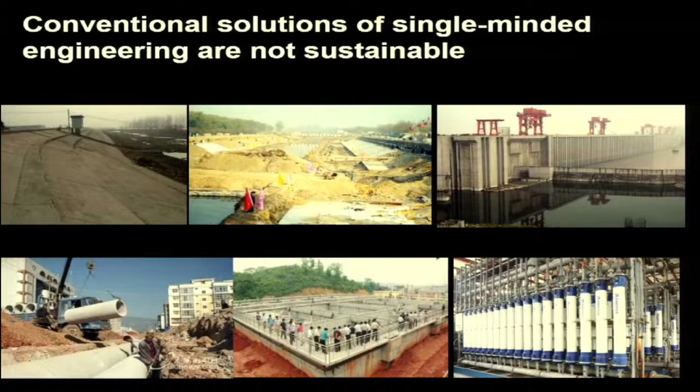We share the same problem today: global climate change, flood, drought, pollution, habitat loss, and many more. Conventionally, we have very strong engineering solutions based on industrial technologies. We build dikes, ponds, pipes, sewage plants, trying to solve this problem one by one, single-minded, one shot, one problem. But eventually we find those solutions didn't work. Cities get flooded all the time. We didn't solve the problem. 85% of sewage water still runs into the rivers, globally. In China, 75% of surface water is polluted, and in other developing countries in the south, maybe more.

So I'm talking about an alternative solution, which is sustainable, not so expensive, easy working, nature-based, holistic. The ecosystem service-based solutions, the nature-based solutions - we call it green infrastructure. Landscape architecture can play a key role in putting forward this idea to create this alternative green infrastructure, which I call ecological infrastructure - through planning and design. For the planning, we can solve the problem globally. We think of the globe as a garden, as a landscape.

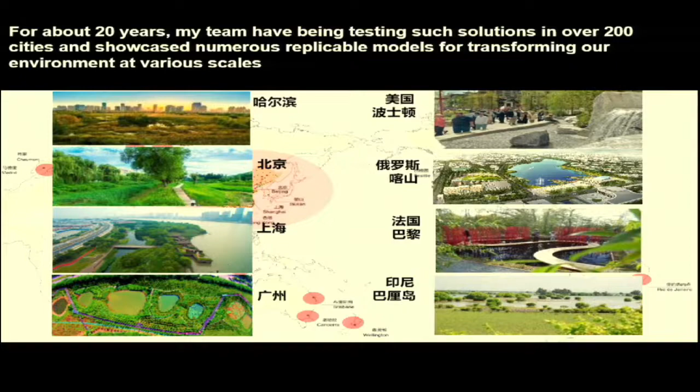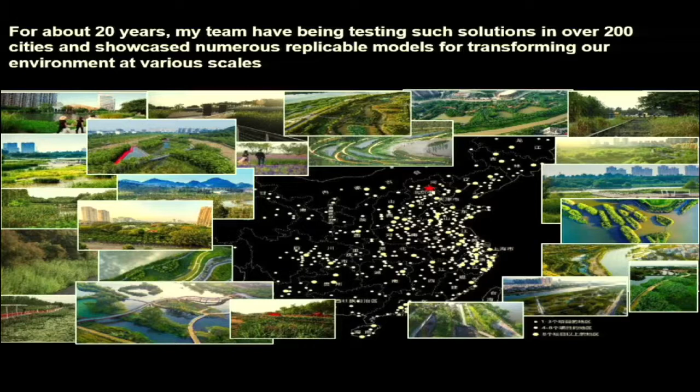In the past 20 years, we practice this kind of nature-based solution globally, but particularly in China. We have built over 500 projects so far in over 200 cities in China. We also have projects in about 10 countries - Russia, US, France, Paris, Indonesia. In China, these projects demonstrate how we can use landscape as infrastructure to solve problems holistically and across scales - national, regional, urban, all the way to your backyard and even your bedroom. That's the idea: how can we use nature as a solution.

For example, in China, engineers usually try to protect the city from being flooded. But when we look at the rivers, the water only takes 1% of the whole national land. Yet every year we invest billions of dollars trying to protect the city from flooding. Why bother? The water only needs 1% of the land, maximally maybe 6%. That's the case in China, and I'd say it's quite similar in other parts of the world.

Because we built the city in the wrong place. 70% of the cities, in terms of land area, are built in the wrong place. For example, in China, 70% of GDP, or 70% of population, is distributed in the flood zone - high-risk flood area - which means at the beginning we built the city wrong. We selected the wrong place. So we have to think: how can we select a better site for the city, for future development?

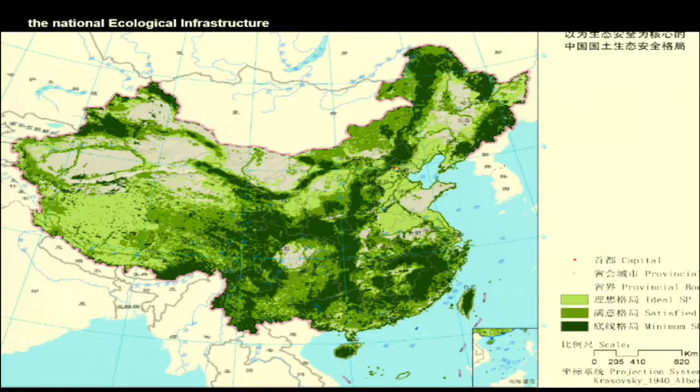We still need to move a lot of people from rural areas to the city. So what should the next city be? Where should we build it? Like Indonesia - just a couple of weeks ago, the Minister of Indonesia for Development and Planning visited my office and said they're going to move the capital. So where to build the capital, without being flooded, avoiding flood? That's the job landscape architecture should do.

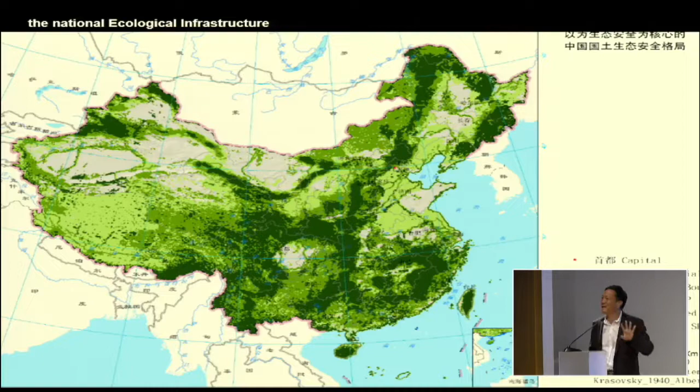So we think globally. If we keep the green area protected, we virtually create an ecological security for the nation. That's how the city should be built. That's a vision at the national level of thinking.

Regionally, how can we avoid flooding? Keep the water, protect the habitat, and integrate with bicycle lanes and pedestrian networks. All together, create a green sponge that can hold water. So the monsoon flood will be kept on the ground, seep in, retain, and go back to the aquifer. That's the whole idea about the sponge city - without diverting water to the ocean, but trying to keep and retain it, because the whole world is in shortage of water, and we have dry seasons.

During the dry season, you need water. So use landscape as a remediator of water. So the city will build differently. Instead of based on gray infrastructure—build pipes, build highways—we say why don't we use a natural system as infrastructure, for example as a drainage system. So we will have a much more sustainable, more resilient city.

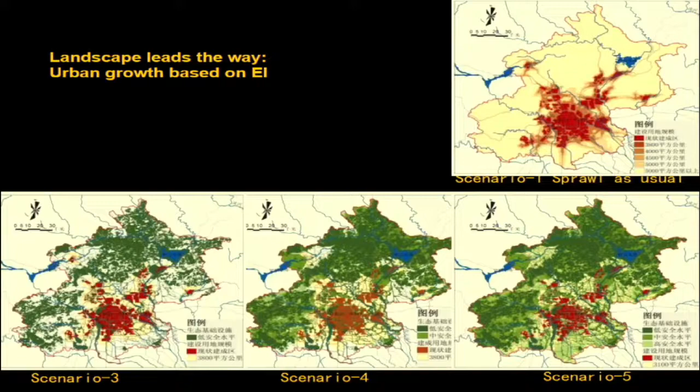But the ponds were created by farmers for thousands of years. The farmers know how to regulate water—create a pond to irrigate the field, to remediate the monsoon climate. During the rainy season, they keep the water. During the dry season, they use the water to irrigate the rice paddy. That's the whole idea, from our tradition. But the Industrial Revolution wiped out all this wisdom based on experience.

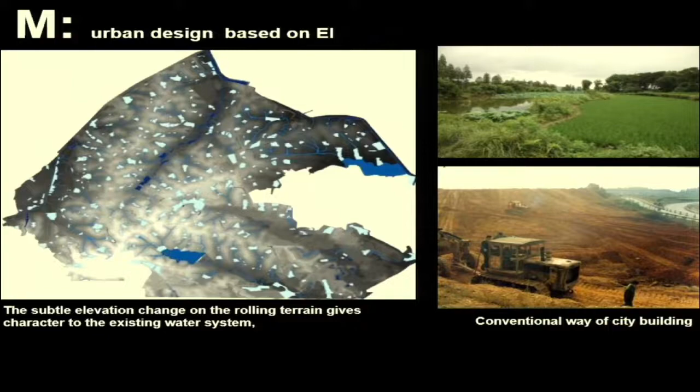So alternatively, we recover this ancient wisdom, turn this pond into existing water heritage—it's cultural, it's natural—and integrate them into a green infrastructure before the city is even built, then integrate it with a bicycle and pedestrian system, and afterwards develop the land. The city is built after the landscape is planned and designed. Now that's the master plan.

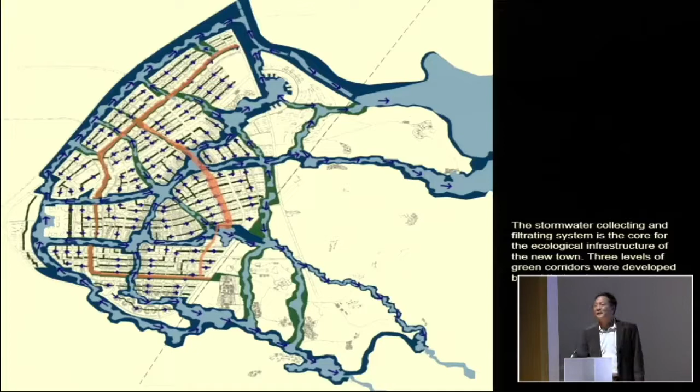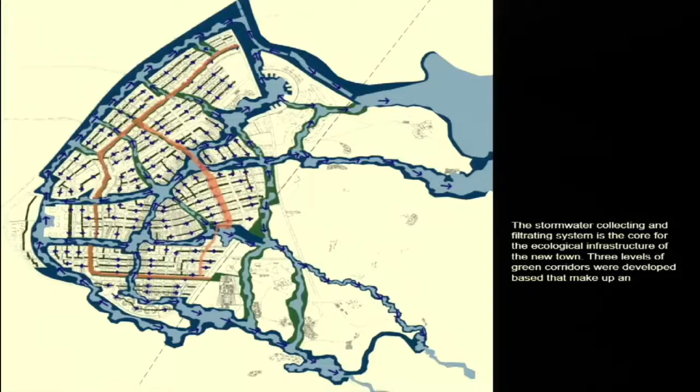See, without pipes, the city can be built without a drainage pipe—they use the landscape as green infrastructure to deal with flood and drought at the same time. That's the rendering at the beginning, designed 10 years ago. It was built. Today you see how we use landscape as green infrastructure—no pipe, no bulldozer. We don't even use a bulldozer to level the ground.

Look at the drainage system from the community, from the roof. The water comes from the roof into the sponge within the community, within the city. During the rainy season you have the creek, but during the dry season you still have the vegetation. The wetland system functions as a filter for the dirty water. Remember, the pipes on the street always get stuck by silt and dirt—they didn't function very well.

But here, the landscape heals itself—resilient, cleans the water, and at the same time stores and retains the water, creating a self-irrigating, beautiful vegetation. So it's ecosystem-service oriented, not a single-minded engineering solution. That's planning—thinking about the national, global, regional, city scale. Landscape leads all the urban development, creating green infrastructure.

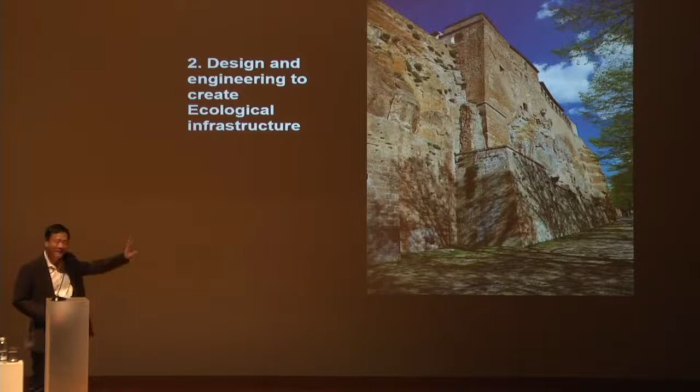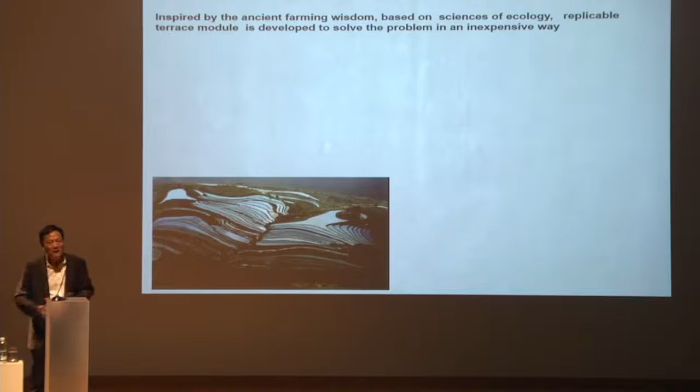But what about here? This building—look at it. It's architecture. I call it deep form, deep architecture. You cannot separate nature from culture, so it's landscape. The terraces in Thailand, you see the rice paddies—it's a cultural landscape, but it's nature at the same time. Underneath is nature, process, patterns; above it is culture. It's a deep form, not a shallow form.

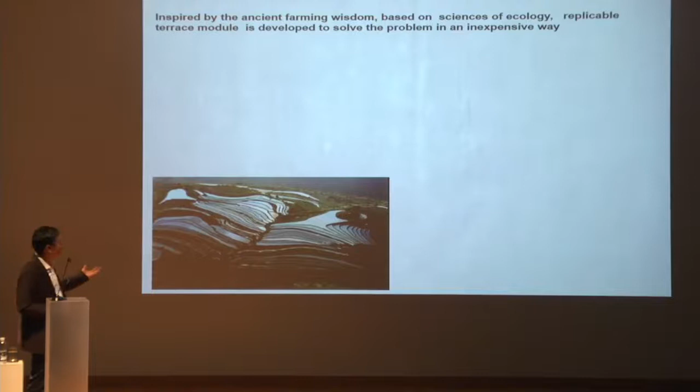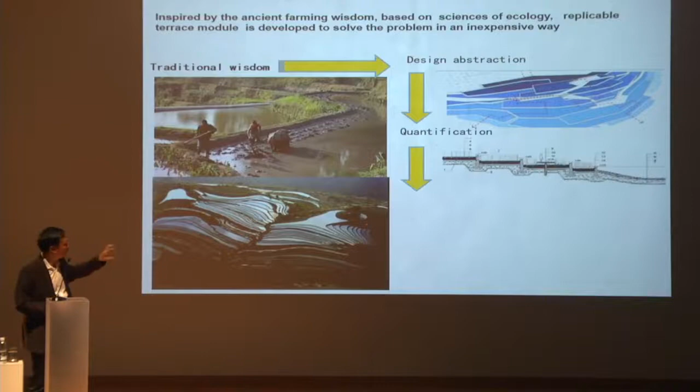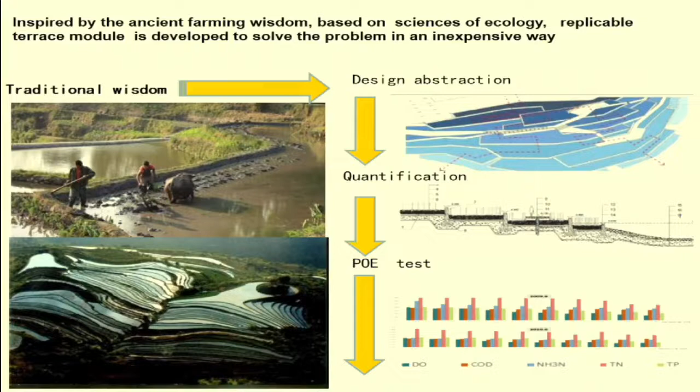In this case, inspired by science and by tradition—farming. The farming process is a cultural process, but it's totally based on nature: the waters, the terraces, the terrain, the vegetation. So we get inspired by this, abstract it, create models, quantify it, and test it. It's tested, post-occupancy, to see how it works, and becomes a modern technology, replicable across scale.

The local government got $1 billion to channelize the river. When the project was finished halfway, the farmers protested. The farmers don't like it. Why? Because the buffalo cannot go into the water to get water. And when flood comes, people cannot get up on the line and get drowned. And the frogs disappear.

There are no frogs in the city, because the tadpole cannot climb to the land to become a frog. So what should we do? The mayor called me to find a solution. So I said, here's a solution.

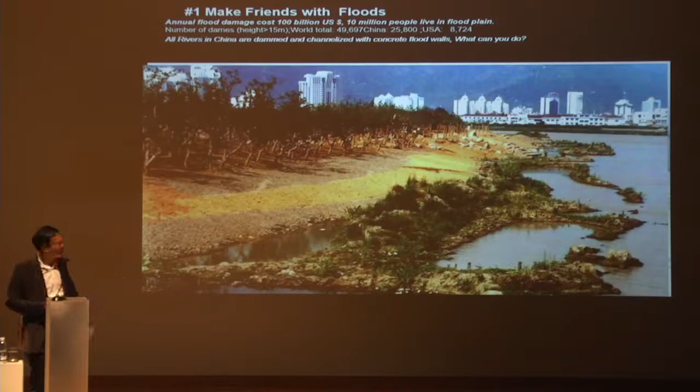We need to remove the concrete and recover the land. This is resilient. The grass is more powerful than concrete. Concrete will collapse in 20 years, but this native grass will be here forever. They regenerate themselves - they're living concrete, a living powerful protector of the soil.

We are based on science, even more scientific than the hydrological model. Because today we understand, based on geographical analysis: here's the 10-year flood, here's the 20-year flood, here's the 50-year flood. The flood doesn't go anywhere. So why do we use one section to channel the river?

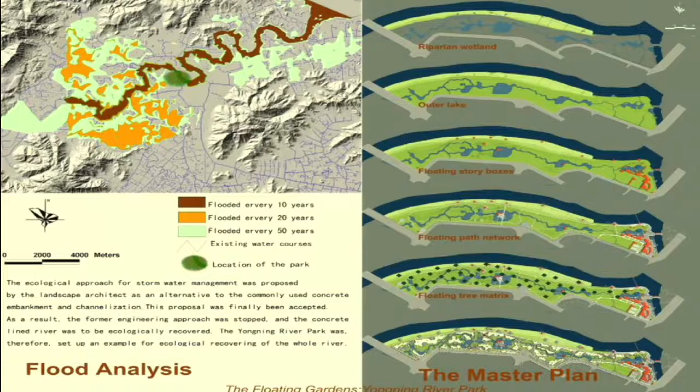It makes no sense. So here we say that if it's flooded, we make it into a park. If not flooded, we can build over it and it becomes a city.

This was before - an engineer did this 20 years ago. Now this is today, a landscape architect did this. We removed the concrete and turned the river into two rivers. It's the same space, by the way - we don't have enough space - but we created a landscape which is resilient.

We have an inner river for flood. During monsoon season the flood can go there, but during dry season we divert water so it can go to the city, so people can touch the river all the time. We pump the dirty water and cleanse it, making it touchable and swimmable. People used to see concrete, now they see a landscape - that's the inner river, a filtration process where vegetation cleans up the water and people enjoy it.

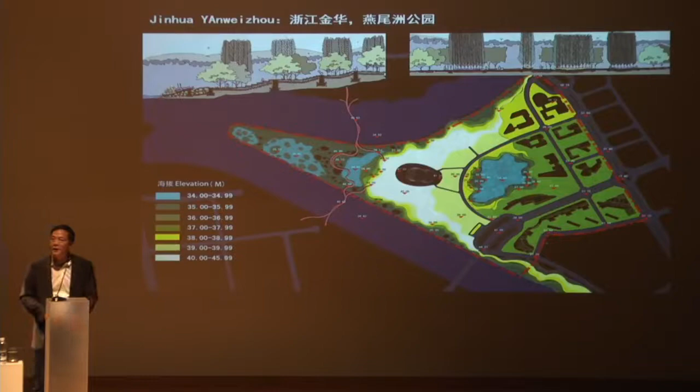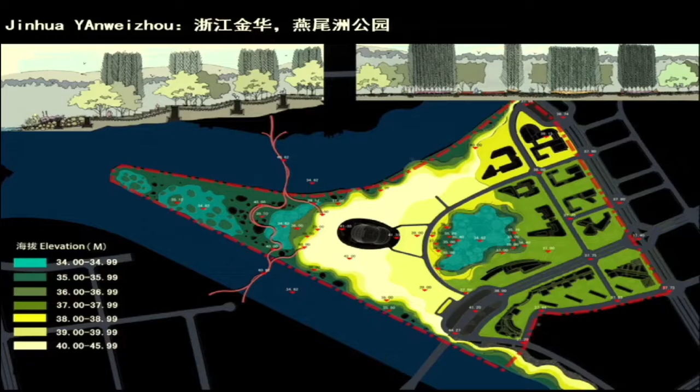So we demonstrated this kind of project, and now we get so many visitors from mayors. So then we have a bigger project, a huge project - this one is also in my hometown. A huge concrete dam-like dike.

So we remove it and terrace it like rice paddies on the mountain, following nature. This is a bird's eye view - you can see where the dike used to be. So we remove it. There's the 1-year flood, 10-year flood, 20-year flood, 100-year flood. We share with the flood, share with the water. Most of the time it becomes a park, and only occasionally it's flooded like that.

Occasionally, maybe once a year, or maybe just one day. That's the monsoon climate - flood after flood. All the silt and water will irrigate the whole landscape. But even during flood season, you still have pedestrian and bicycle connectivity. In the dry season, above is the 200-year flood level, below the 10-year flood level.

So it's resilient - the city is resilient. We use the landscape as infrastructure, and let water come into the city.

Here is a showcase to show you how we can transform and recover the coastal area, to recover the mangroves. This was before - two years later, it becomes like that. The mangrove recovered, making the city more resilient.

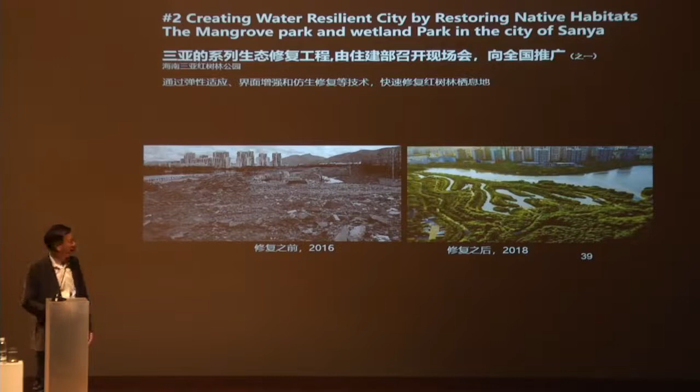This is in Sanya, the same kind of climate - monsoon, tropical. You can see our investigation, our geographical analysis, to see where it's flooded, where the coast gets high, sea level rising, monsoon flood. So it's a whole system - the whole flood area becomes a sponge. We want to create a whole sponge system in the city.

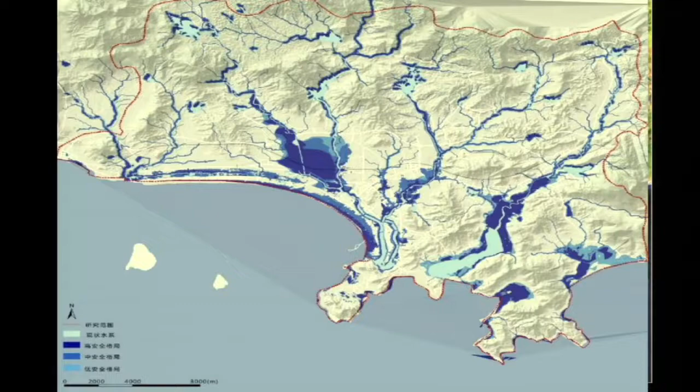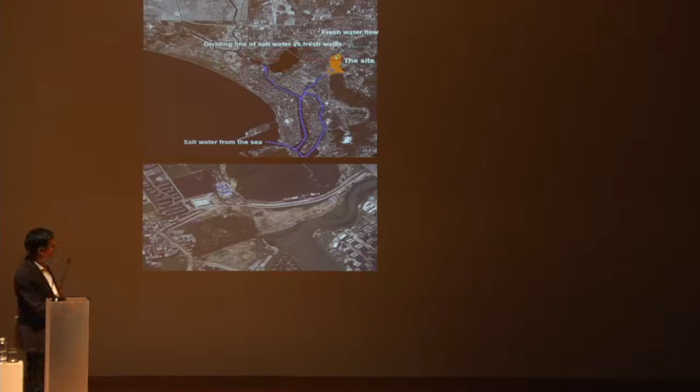Now that's some of the major pieces. One little piece, about 1 square kilometer in size, is a test ground to create a sponge city. This project is at the coastal area - it used to be a mangrove site, now destroyed because of construction. We want to recover it.

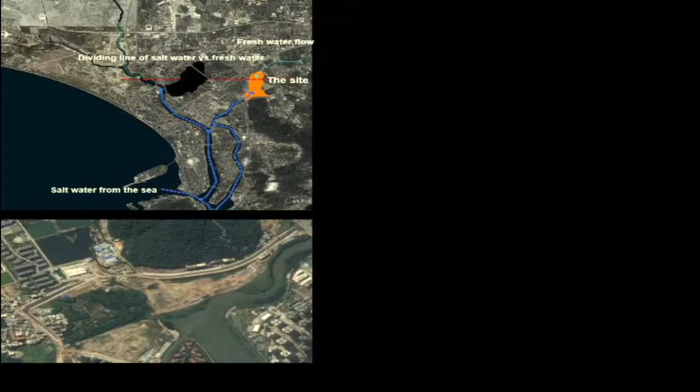So we analyze this as a site. This is sea level, sea water, and this is fresh water. When they meet here, they create habitat for mangrove. This was the site, and this was the process based on nature - the tide, the fresh water, the tide.

So let nature recover, let nature do the work. When salt water and fresh water meet, they create a habitat habitable for mangrove. It's in process - that was the site, this is 1 year, 2 years. The salt water and fresh water come from this way, so we create nature - people and birds coming, bird watching, pavilions.

So these are all completely nature, and there's a city built around it. It's just in 2 years recovered - in 2 years, you see.

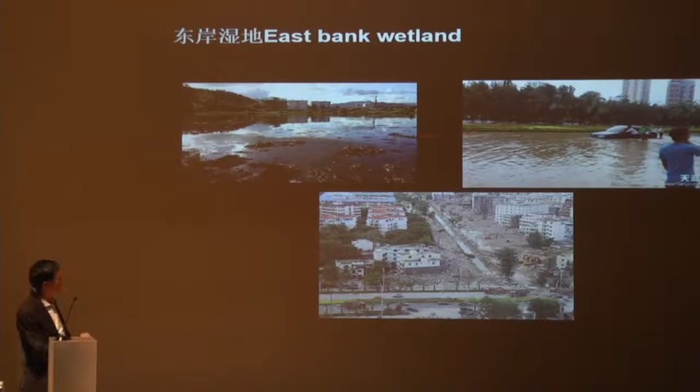And there's a project in the city, in the middle of the city. The whole city is flooded during the monsoon season. From March to May is the monsoon season. The whole city is flooded like that, right in the middle of the city, you see?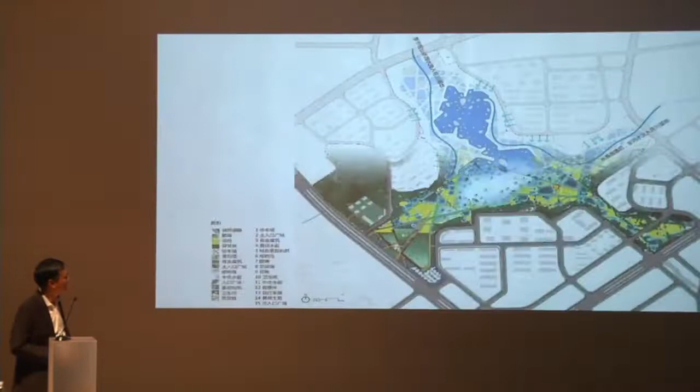So the idea is that we'll create a sponge right in the middle of the city, using a very simple technique learned from farmers: cut and fill, pond and dike system. No import or export of dirt on site. In one year, we finished the project at the beginning like that. Pond system, dike, and islands, simple. And that's before.

Two years later, it becomes like that. The islands absorb, retain the water, but also remove all the nutrients, all the dirt. This was today, only two years later. That becomes not only a solution to the water problem, but also creates economic value for the city. You can see the land value tripled in this area. You can imagine.

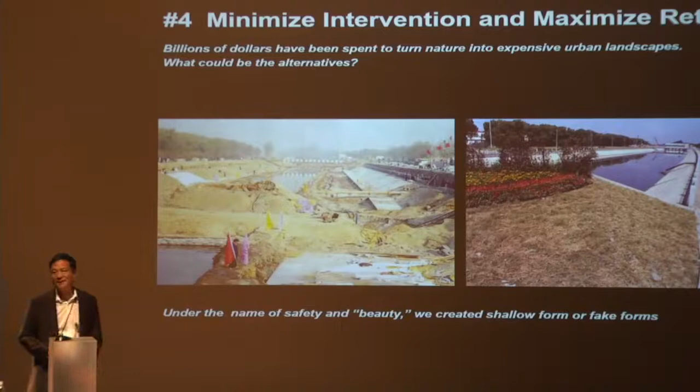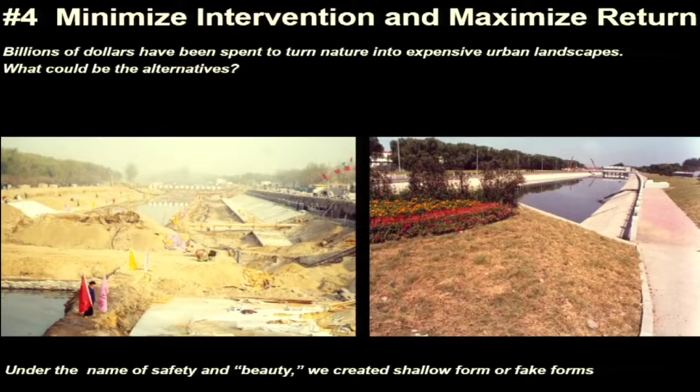The fourth strategy is minimize the intervention, maximize the ecosystem services. This was the traditional, conventional engineering solution: channelize it, concrete, dike, damming. The natural river has been totally transformed and lost all resiliency. Minimize it, keep nature, let nature be. You don't have to deal with nature to design whatever important artifacts.

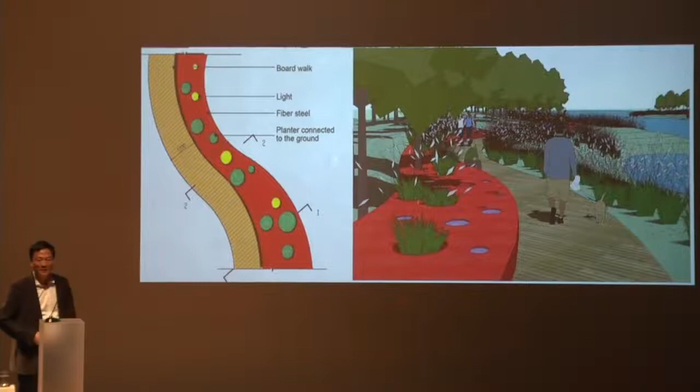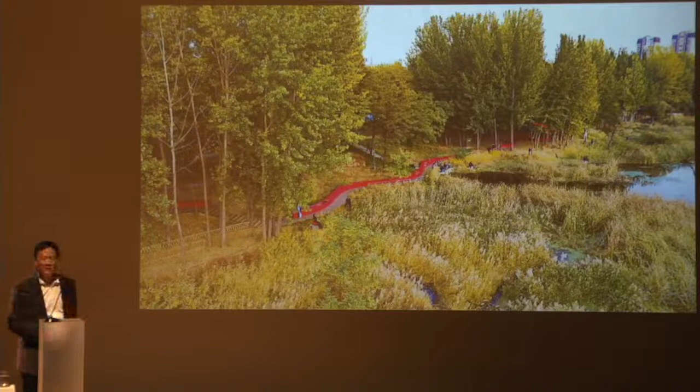So I use very little art, transforming the natural system with a bench. This bench is 500 meters long, but only one bench, nothing else, and a boardwalk connected with the bench for people to sit, with lighting, for people to enjoy, following the art, to enjoy the beauty of nature. But that's only one bench.

The river wasn't touched, not a single tree was cut. Everything is nature, no care, no irrigation, no fertilizer, no spraying, no maintenance. Only this one piece is man-made. And suddenly it becomes an attraction for people. It used to be very wild, very messy, and suddenly it attracts people. Look at these three old ladies, in the morning here, still here at night. So that's a little intervention, but it maximizes the service people get from nature.

Native shrubs, native trees, a little bench, like a lady—you don't have to go get cosmetic surgery in South Korea. It's very expensive, you spend $2,000, maybe $20,000 to get cosmetic facial changes. But using one bench also transforms your face dramatically, with very little touch, keeping your own authenticity. That's the city—it's the same as nature.

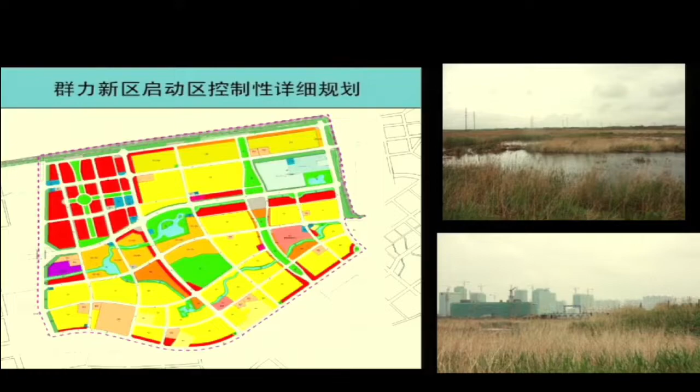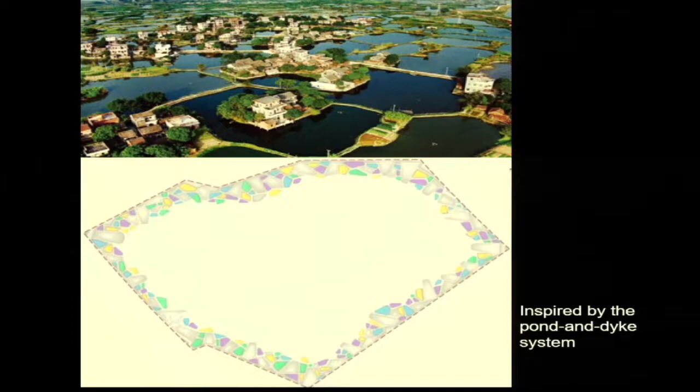It's gotten dry. Now we're inspired by this—the Pearl River Delta area, in the river delta, like Mekong River regions, like here, like Thailand—cut and fill. The marsh, the swamp becomes inhabitable, becomes productive, and becomes dry land. So you raise fish in the pond and grow vegetables and fruit trees on the dry land, and build settlements there too. So it's the same idea.

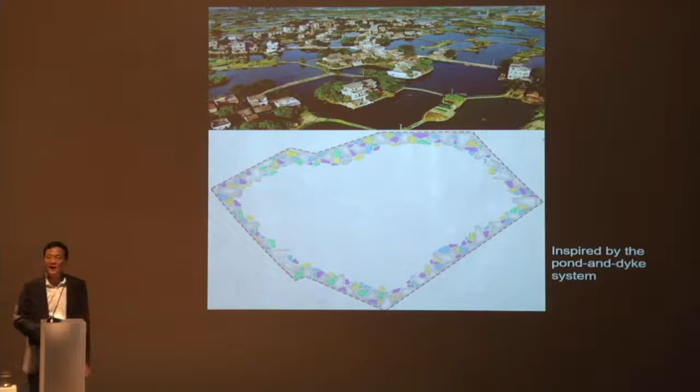This is a whole park, about 33 hectares in size, surrounded by buildings and the city. So we create a necklace, a very simple necklace, cut and fill necklace. So we create a porous landscape, a filtrator, a sponge, a filtrator.

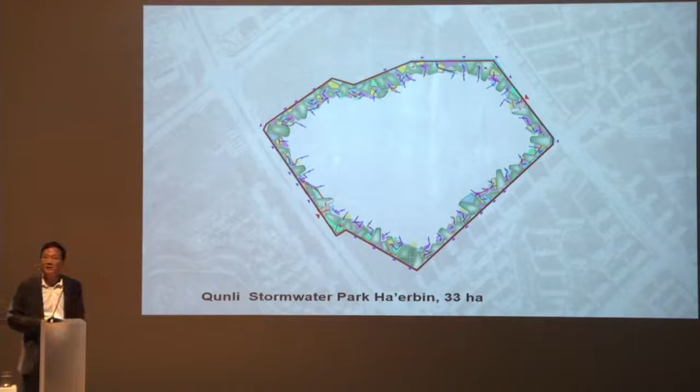So the water from the surrounding landscape will filter through this porous landscape, go to the middle of the park. You even didn't touch the center, right? Let nature evolve. But this part functions as a retention and purification of storm water. And we tested actually very poor water, and it gets cleaner and cleaner. Here will be clean water, recharging the aquifer.

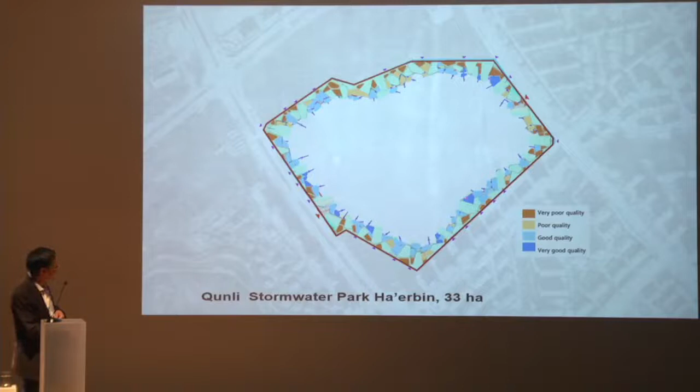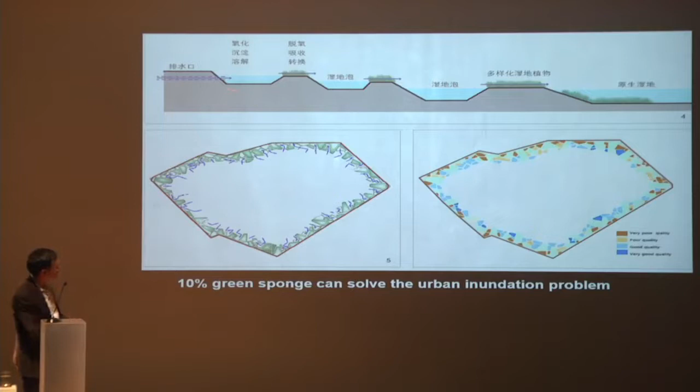10%, if the city gives 10% to the sponge, you basically solve the problem. In China, the rainfall is about 1,000 millimeters. In Thailand, I would say maybe 20 to 25% will be enough to solve the problem of flood. You have maximum like 2,000 millimeter rainfall, maybe maximum 300 millimeters a day of storm water. So you will use this system.

The pipes will never solve the problem. 300 millimeters precipitation in one day, the pipes cannot work. So only landscape, only the natural system will work because it's resilient. It's resilient. So that's built, you can see. And birds, many new birds come into the city, so we will have bird watching pavilions.

So what about the pollution? As I mentioned, 85% of sewage in developing countries doesn't get treated and runs into the river. So all the lakes, all the rivers are polluted. And this pollution is basically nutrients, phosphorus, nitrogen. These are difficult to be treated by industrial process, by sewage treatment process.

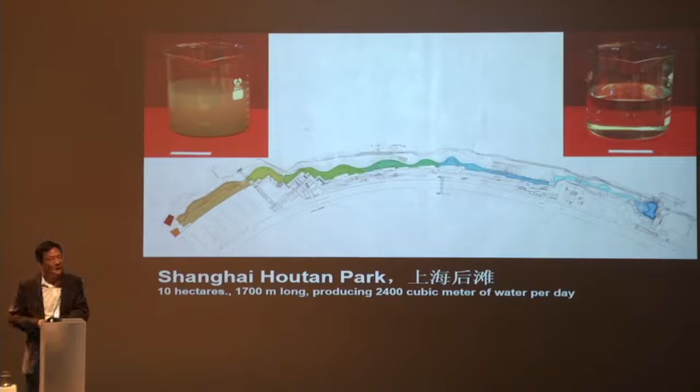But they use a natural process. It's easy because they're basically fertilizers. For farmers, they're fertilizers, so we use a biological process. We can basically remove 85% or even 90% of the nutrient from this wetland system. And certainly it's a designed wetland, not a natural wetland. Natural wetland also has the function of removing the nutrient, but those processes usually aren't so efficient. So we strengthen, we empower, we make a designed wetland to make it more powerful, to remove the nutrient.

This is in Shanghai, Houtan Park. This was the site before. It's a part of Shanghai Expo. As I said, inspired by the ancient tradition, ancient wisdom of agriculture. A cascade wall for aeration, creating oxygen in the water, fertilizing it underneath, so the plants can take all the nutrient.

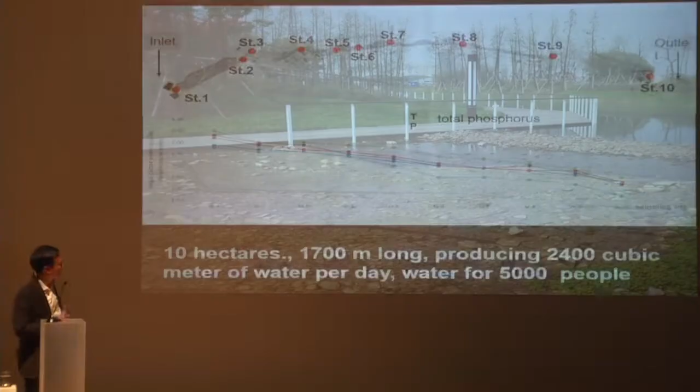We tested and measured: 1 hectare of constructed wetland can produce 240 cubic meters of clean, swimmable water that you can use. That's a test we've kept running for over 10 years, observing it become replicable across a larger scale.

We applied it a couple of years ago to even a worst-case whole river in Haikou, Hainan Island. The river looked like that 3 years ago. Engineers did a lot of work for 20 years, building dikes and trying to drain away all the dirty water, but it didn't work because that's a single mandate.

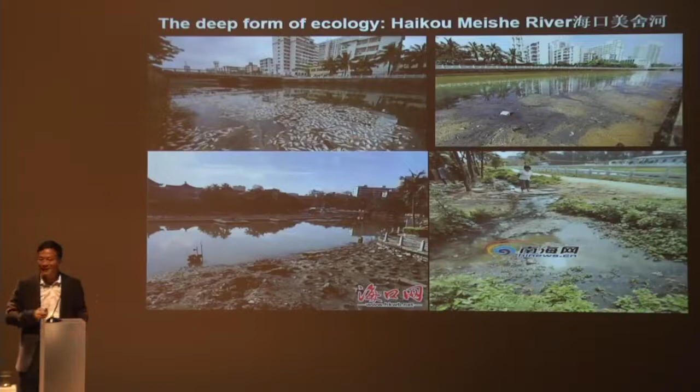We want holistic solutions, solving the problem as ecological infrastructure: managing the stormwater. We call it non-point pollution—we don't know where it comes from—but we create infrastructure to transform the whole river system, catching all the stormwater and separating it from sewage, which we still need. Cities like Bangkok mix sewage with stormwater, and that makes sewage treatment useless.

So first you have to separate the sewage—it goes to treatment—while the stormwater goes to the rivers, lakes, and landscape. The solution is actually very simple, but we never do it. So we separated the pipes and removed all the concrete.

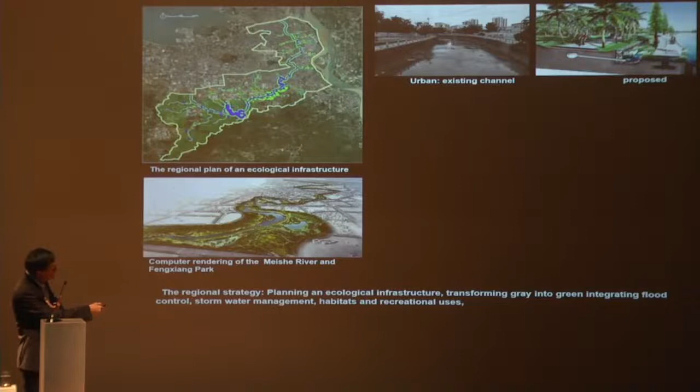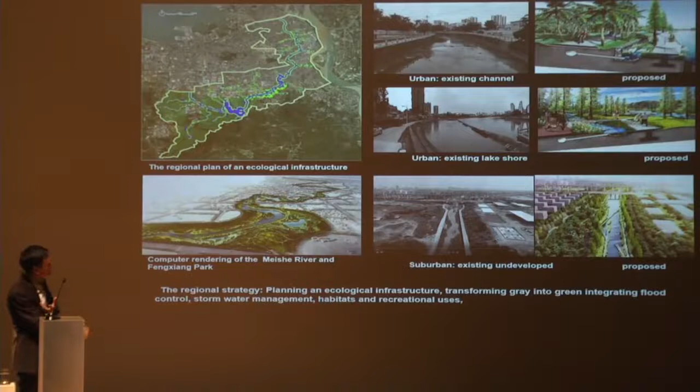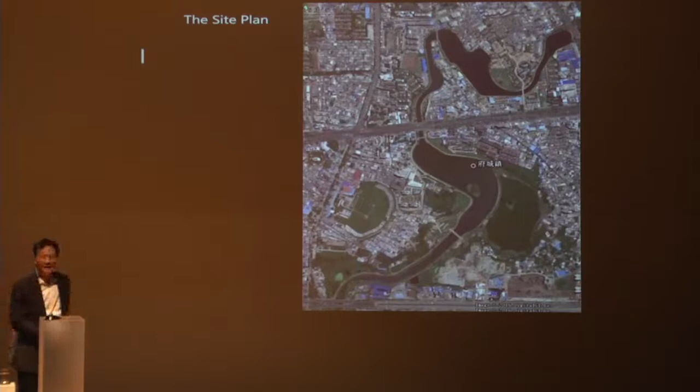This was concrete; we removed it all and turned it into landscape, separating sewage from stormwater. These sections show proposed versus existing conditions—you see the whole river channelized like that, like a human body, hard to be resilient.

So that's our design for the river landscape: wherever possible, turn the riverbank into soft, ecologically friendly green space that catches the stormwater and sewage at the same time. This is a sewage plant.

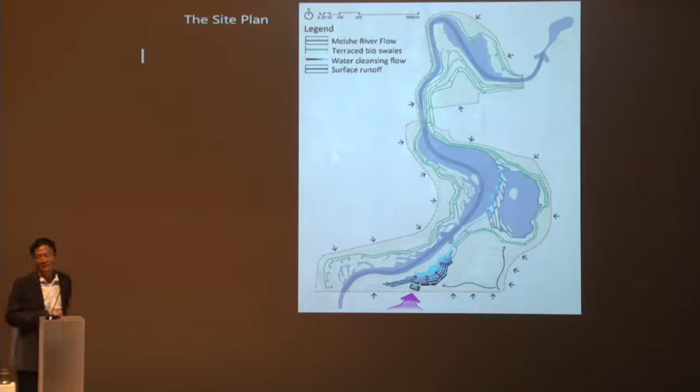We even tested diverting sewage into the river, pre-treated by this wetland system, which removes the odor, color, smell, heavy metals, and antibiotics—those are easy to remove—but keeps the nutrients, the nitrogen and phosphorus. This creates a recovered river, removing concrete and turning the bank into functional terraces, like rice paddies.

A year later, I'll show you—this became totally transformed, the same site. That's the whole system: the river being recovered with very lush vegetation, because you have so much nutrient and so much water, and the vegetation loves it.

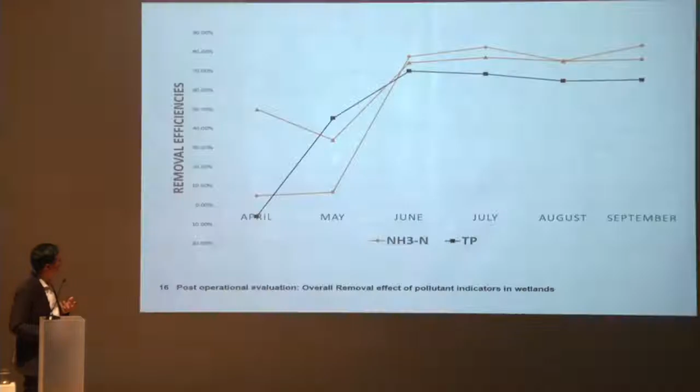So that's the whole cleansing process. At the end, at the sink of the sewage water, we create a park—a lotus pond. Look how many people use it. We recycle the concrete, turning it into islands for vegetation, at the end where the river meets the ocean.

We tested and measured that 85% of nitrogen can be removed by this process—the water becomes clean now. As an even bigger project, a whole river about 20 kilometers long looked like that 5 years ago. Now that's today.

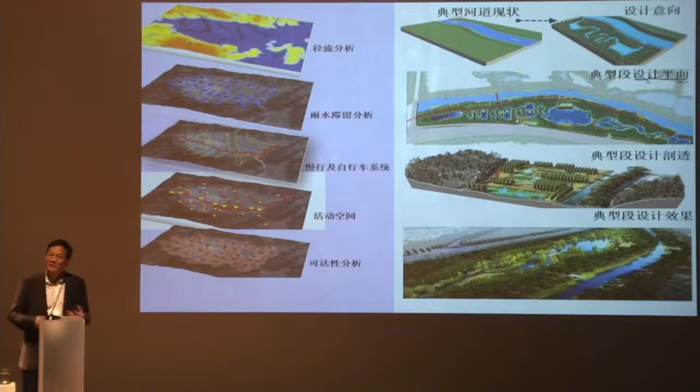What do we do? We analyze the whole drainage and hydrological system, where the water will meet, catching the catchment, integrated with pedestrian and bicycle systems and activities. People use it, and the river is transformed—before and after—just by using landscape as a systematic transformation.

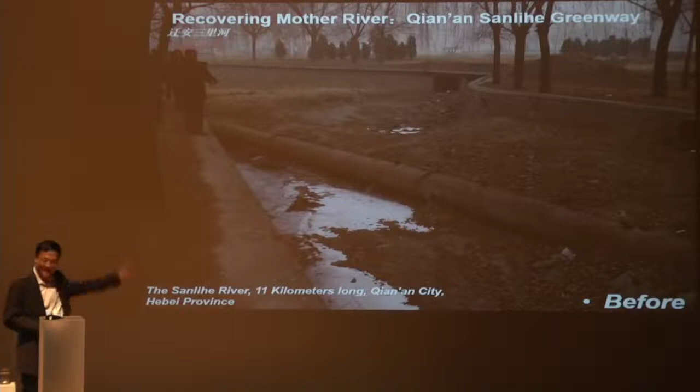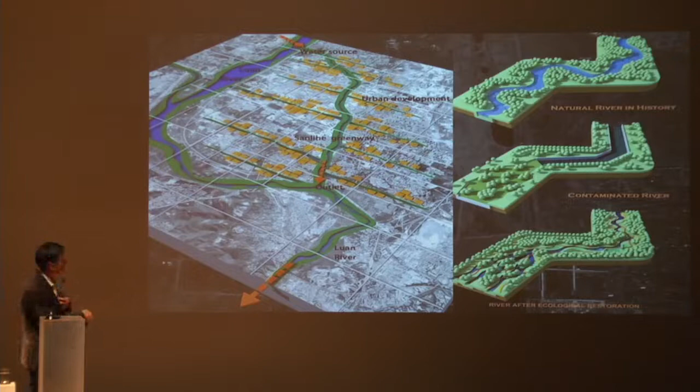This is another project to show how we transform this kind of case—another river system, about 11 kilometers long, separating drainage from stormwater. This is all stormwater facility, creating oxygen to aerate the river as it runs through the city. So when you do the landscape, you actually renew the city—the city develops based on the landscape system, and the landscape creates value for the city.

This was 1970s, 1980s. This our proposal for today: keep all the trees, recover the river, and also integrate with today's activity. People use it as it was before, after. Yeah, integrate with art.

What about soil? Yeah, we have a huge problem with the soil. All the soil is polluted. That's in another case, in Tianjin. Polluted soil and also

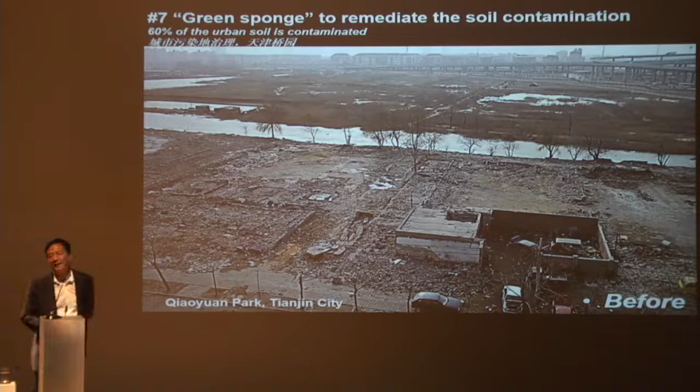alkaline, very serious. We developed this idea: use a sponge to collect stormwater, to use water to dissolve the salt, to make the soil habitable, to create a habitat for biodiversity in the middle of the city.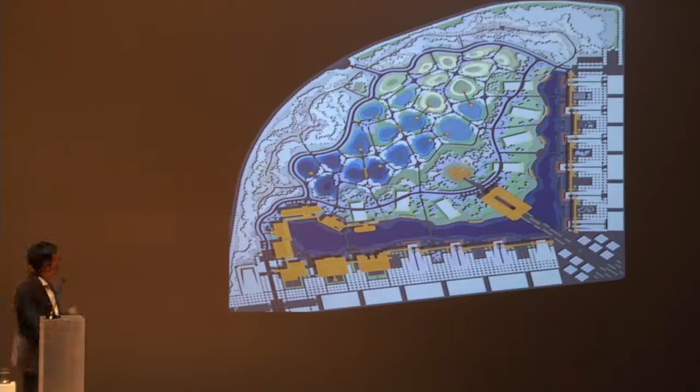So different levels, it's a test, a testing ground. Deep, shallow pond. We create 21 ponds for a park. The park becomes a sponge, retains water, collects stormwater, and transforms the soil, and the vegetation gets evolved.

That's before, after. The pond has native vegetation evolved based on evolution. It's a natural process. The people just love it. Low maintenance, functional, not only as a park but also as a stormwater management facility, and also clean the soil and create habitat right in the middle of the city.

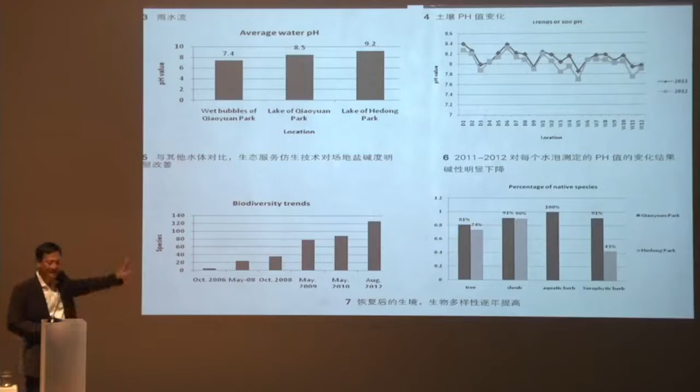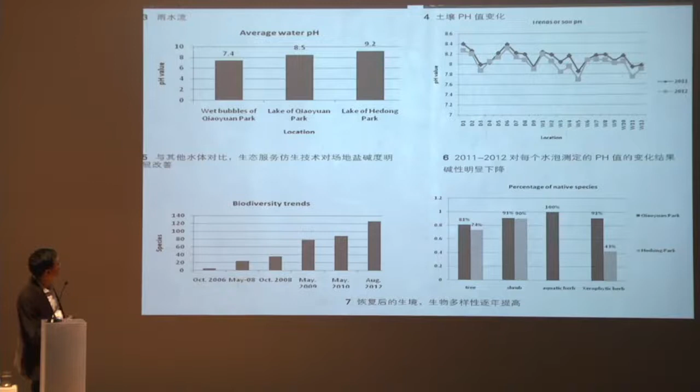That's a performance test. You can see how the native species increase, the biodiversity increases, pH decreases. That's a change of soil, creating habitat, and creating public space for people.

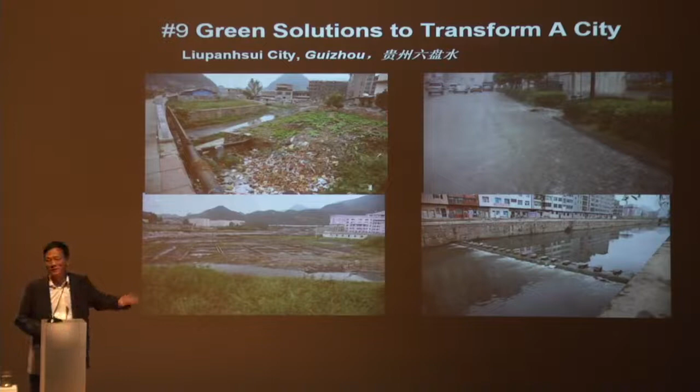If we can do this for a river, a park, we can certainly do the whole city. This is the whole city in Liupanshui, about less than a million population. A river runs through it. We remove all the concrete.

That's a proposal. And all the tributaries, daylighted, so remove all the concrete. Create a network, an infrastructure, green infrastructure. And find patches whenever possible to catch the stormwater, to purify it.

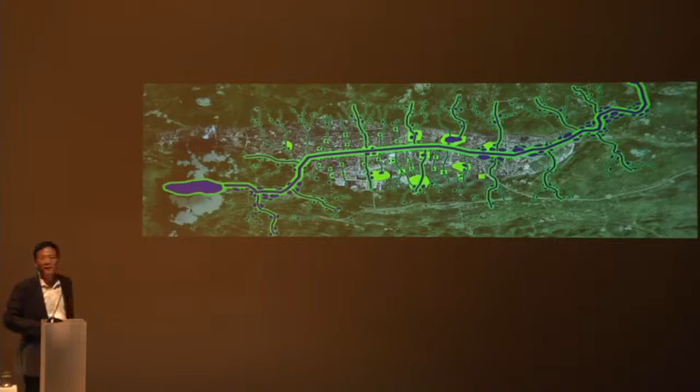Not enough. We want all the ponds to go into individual backyards, individual communities' backyards. Let's create a sponge. The whole idea is a sponge.

Now the World Bank got interested. Last month, I gave 2 lectures to the World Bank, one in DC, one in Asia, in China. This was sponsored by the World Bank. Before, they invested in grey infrastructure. Now they want to invest in green infrastructure. That's a big change. So this was invested by the World Bank.

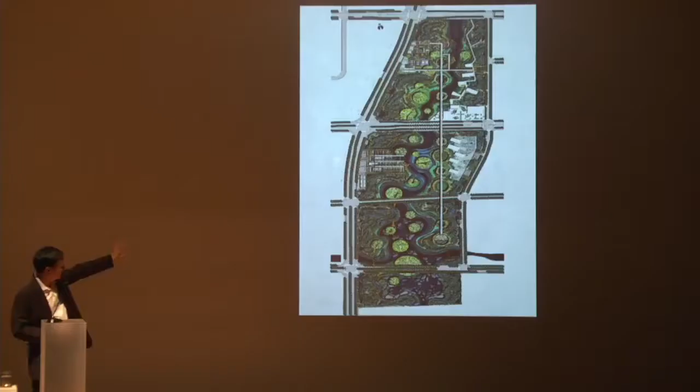That's our rendering, this was before. It's our rendering, this is a rendering. Sections that are built, that's built. You can see right in the middle of the city it becomes such a beautiful place. And they get excited.

And we want the city to be productive again, we call this agricultural urbanism. In the past 30 years, urbanization took over about 10% of fertile land in China and becomes this messy urban sprawl, taking over all the productive land.

So why don't we turn the city productive again? Because we cannot afford to lose fertile land. In China, we have 20% of the world's population, and we cannot be self-sustainable if we lose agricultural land.

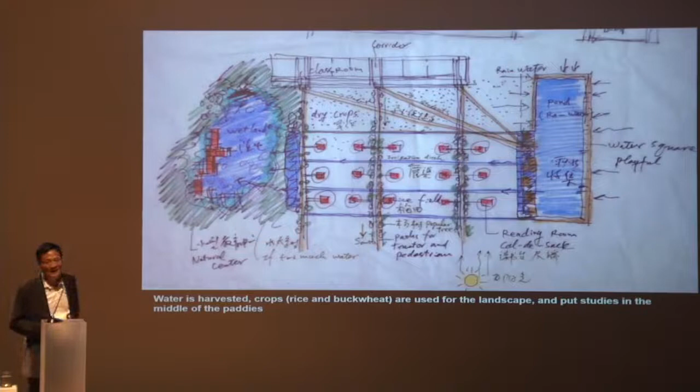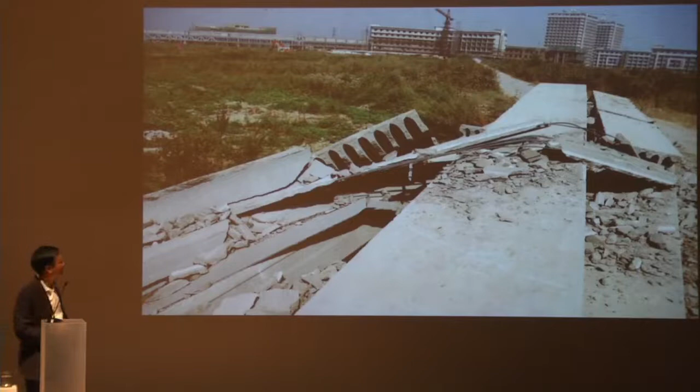So this is a case: 10 years ago, we demonstrated on the campus, turning the campus into a rice paddy and putting a study room in the middle of the rice paddy. Stormwater is collected for irrigation. It was before on the site, as after. 6 months after, we built the rice paddy in the middle of the city.

It's not farmers anymore, we are urban residents. We are upgraded, but here we still have the productive rural landscape. So it's a new aesthetics, we create a post-agricultural aesthetics. And you have activities on the farm, on the campus, right?

Rice planting days, rice harvesting days, you get a culture. And here we keep patches of rice at the corner of the field, because if you harvest it all, the rats, the mice, will come to your house. So we keep patches of rice in the field, so the rats will eat the grain. When they eat the grain, the owl, the bird, will catch the rat. So we remove the rat by ecological process, and produce rice from the campus.

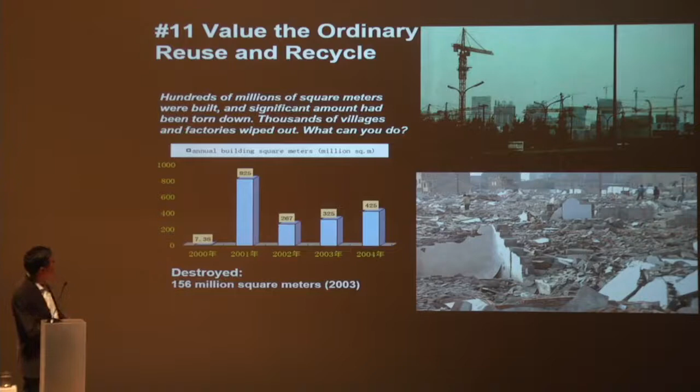Another case is recycling and reusing material, also valuing the ordinary. This is one of the first projects in Guangdong, in a tropical, subtropical area. It was a shipyard. This was 1999 at that time. The whole shipyard went bankrupt, so they wanted to transform it into a public park. Before they demolished it, I started the design.

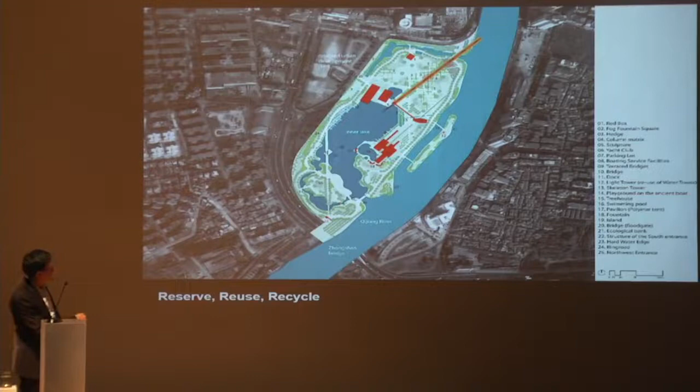We kept whatever they thought should be removed, but we think it's necessary to be part of the memory of the city. In the middle of the city there's a river, a lake, a dock - these are all kept. Before and after.

We kept all the docks - a sponge system again, resilient to water. It was before, it's after today. 25,000 couples every year take wedding photos here - that's the use, bridal photos, weddings.

There's a new aesthetics - messy nature, healthy people, right? It's different. I call this deep form or deep aesthetics, based on nature. Again, wedding photos, recycled machinery, a new culture, a memory of the past here. Red culture - the gate is designed as a commemoration of red culture in the Chinese cultural revolution, the socialist industrial revolution and all things. A new design tells a story of the ordinary.

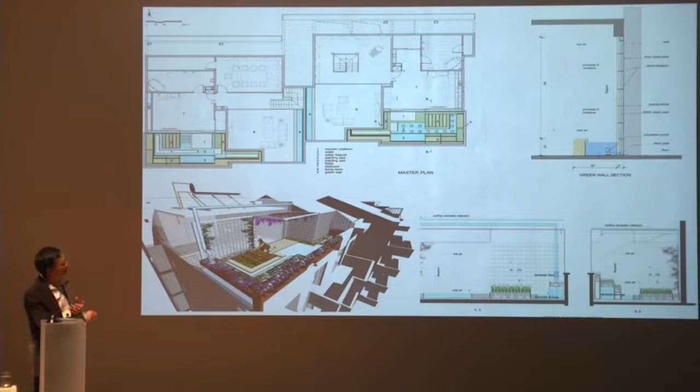So I transformed my own home, a normal apartment, to collect stormwater from the roof and solar energy from the roof also, and turned the balcony into a productive vegetable garden that harvests stormwater. I also let the stormwater go into my own living room - there's a living wall that recycles the stormwater, turning the living wall into an air conditioner to cool off the building. That's the whole idea.

That's built - the balcony has become a vegetable garden. I collect salad from the balcony every day, and we store storm water here. Here's a storm water tank, and here is a gardenia. It's a beautiful garden.

This is my bedroom here, so when I open the door I'm actually in the garden. By the way, this is on the 5th floor - the garden is on the 5th floor. And I also use the recycled storm water in the living room. That's the living room here.

So here, building and landscape merge, right? They disappear - no boundary, deep form. No boundary anymore, nature and culture disappear. But this functions as an air conditioner - it cools off the whole building.

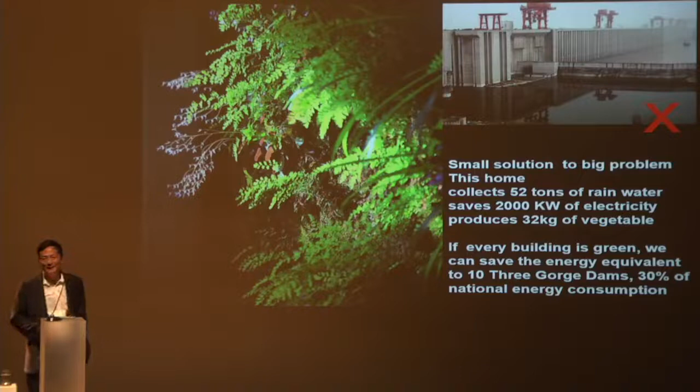This way we can save a lot of energy. We will not build this kind of huge hydropower dam - we don't have to do that. We can remove those.

So these are ideas, green solutions, nature-based solutions, from the regional scale, the national scale, even the global scale, all the way to your backyard. These are my thoughts on landscape: we think like a king, but we act like peasants. That's why we need a huge team to act like a peasant, to transform the whole globe - we were thinking of the whole globe as a green globe.